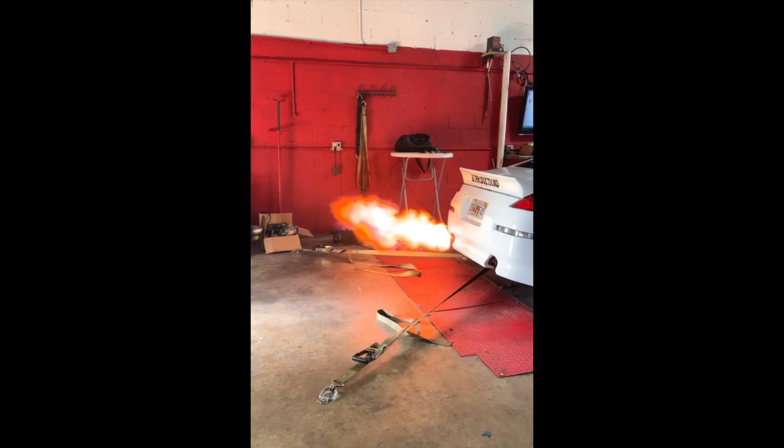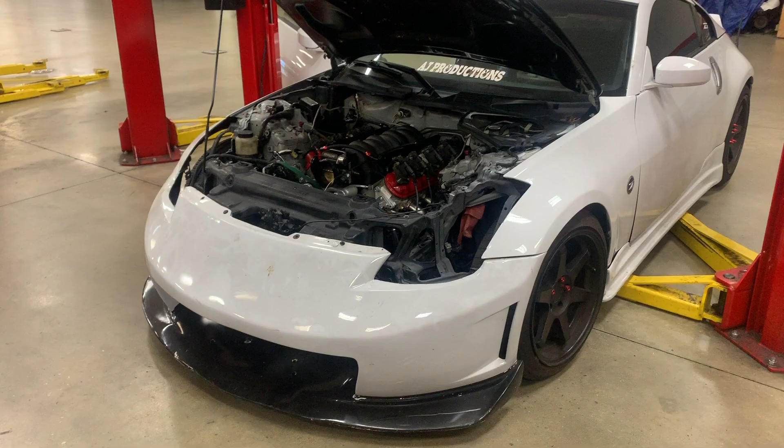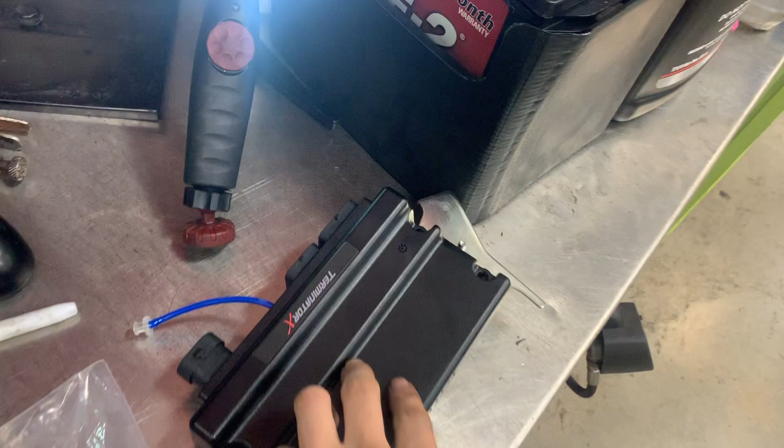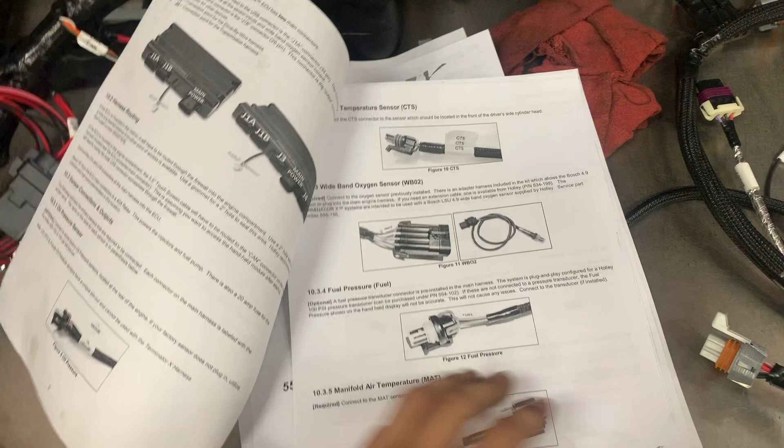Today I'm finally going to be completing most of the wire harness, hopefully all of it, but definitely get most of it done today. Over here is my Terminator X ECU, my handheld, and my harness. Everything is labeled and the instructions are very detailed. It's pretty much plug and play, but I've got to take my time, follow the instructions, and make sure I do this right.

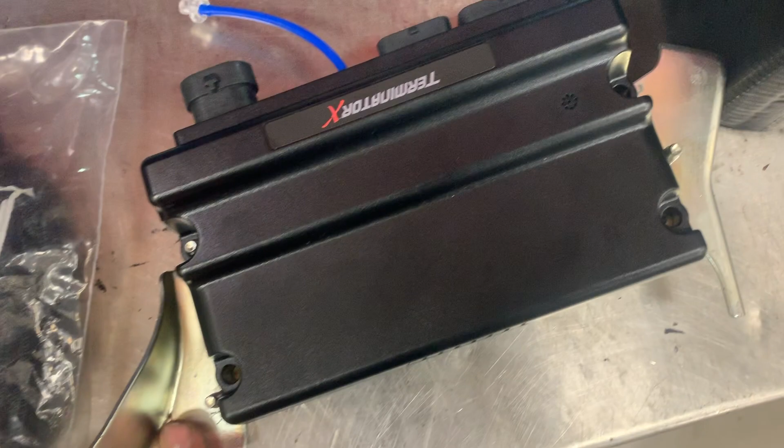The first thing it says to start off with is mounting the ECU. This right here is the stock 350Z ECU mounting bracket, and I'm gonna modify it. I'm gonna drill 2 holes and get 2 bolts in there to bolt on this ECU so I could put the ECU back in the stock location.

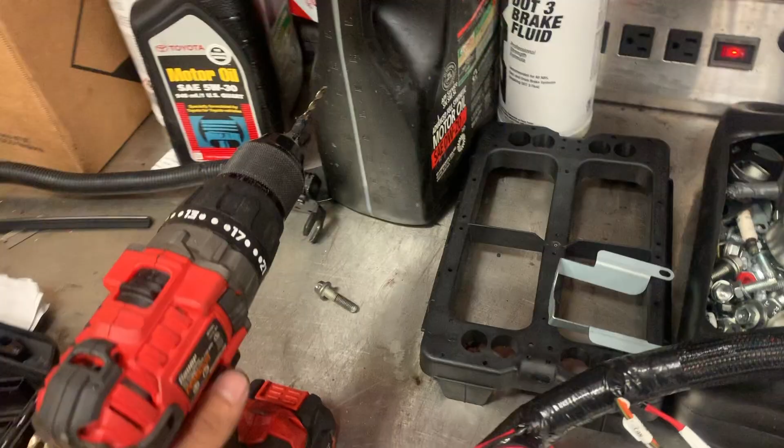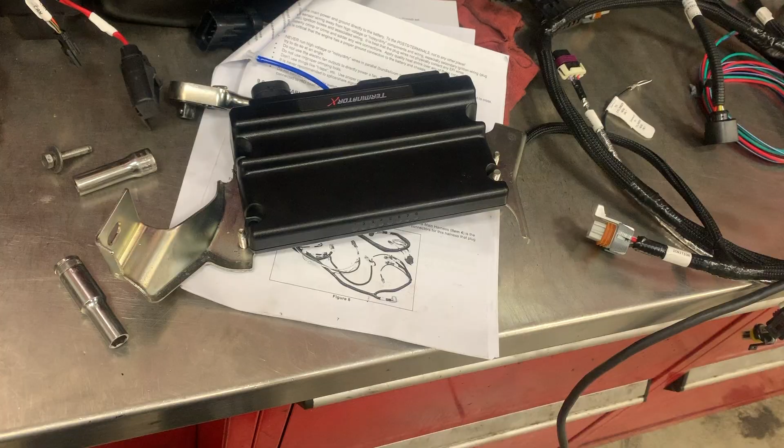So right now I'm about to drill out the bracket and go ahead and find some bolts and bolt it up. I just finished drilling the holes and getting bolts on there. Now I can finally go ahead and install this back in its location.

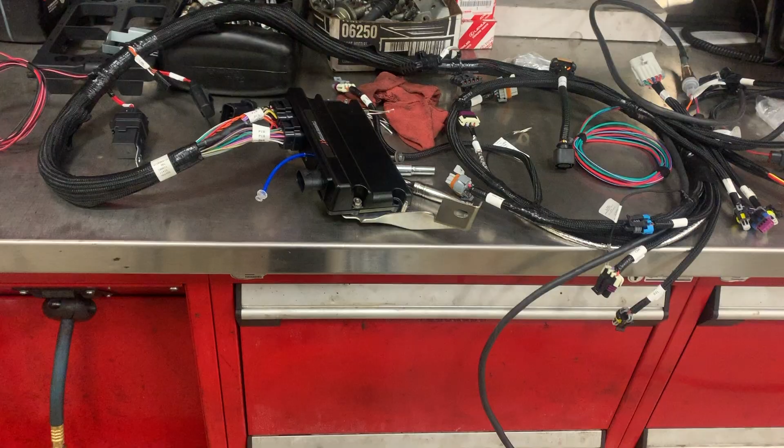Before I mount the ECU, I'm gonna go ahead and run the harness through the firewall, through this hole right here. I already connected the harness to the ECU, so right now I'm about to go run the harness to the firewall and then mount the ECU.

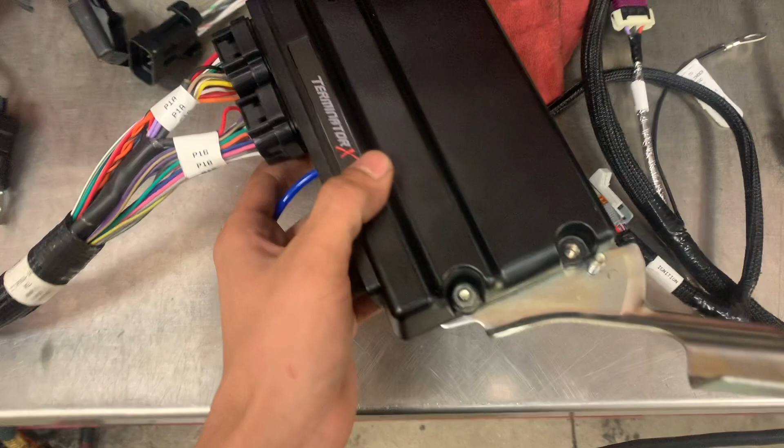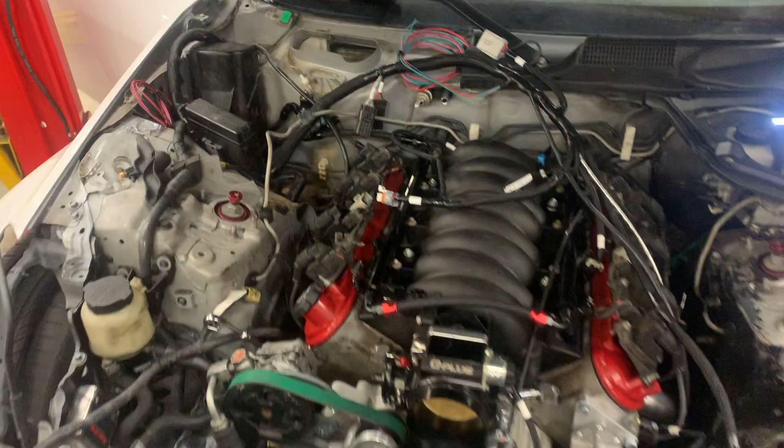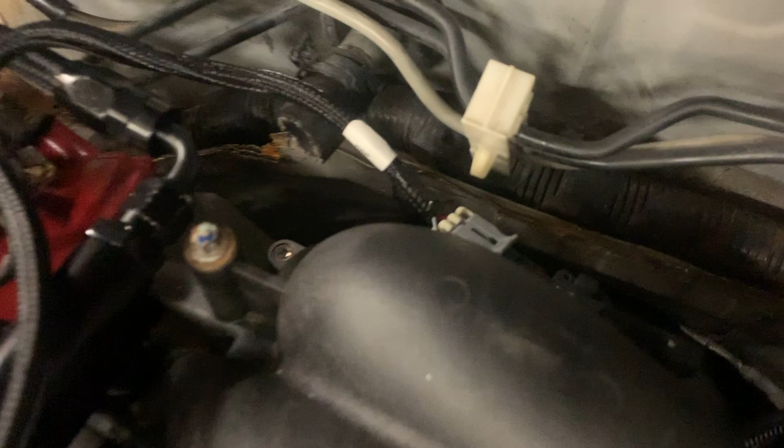I got the ECU mounted and the harness snaked through the firewall. I already started plugging in things. So far I got the TPS sensor plugged in, the IAC sensor plugged in, I have the map sensor plugged in back there, and I also have the knock sensors plugged in right there.

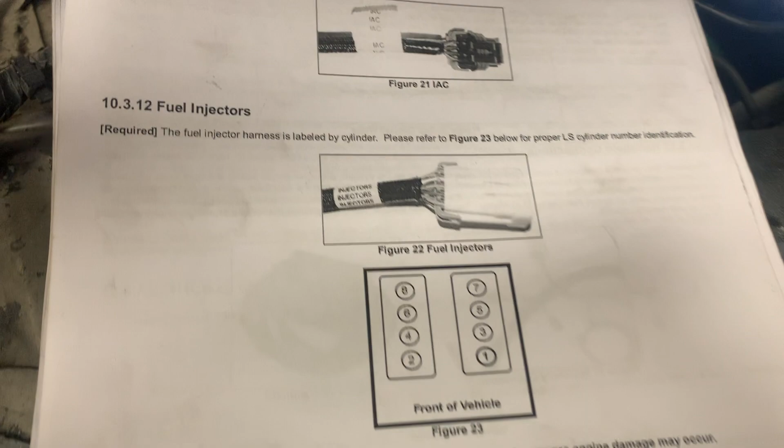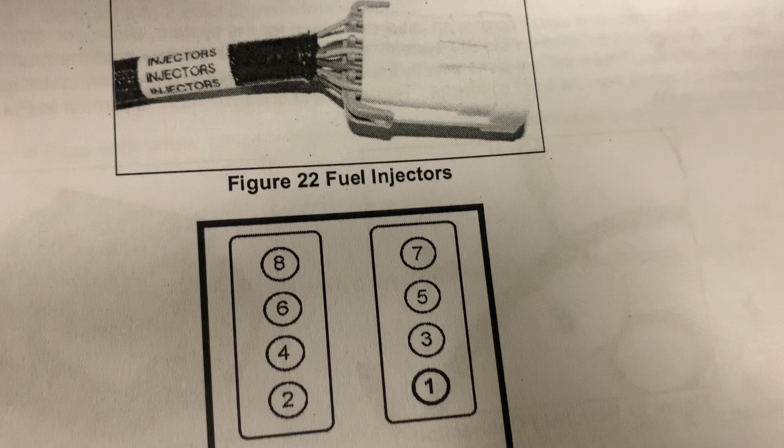Right now it is saying to plug in the fuel injectors. It also gives you a diagram which shows you the cylinders. So right now I'm gonna go ahead and plug in the injectors.

I just got the injectors all plugged in. There's cylinder 1, 2, 3, 4, 5, 6, 7, and 8. I also went ahead and plugged in the ignition coils.

I know it looks like a mess right now, but I'm gonna keep on cleaning it up as I go. Now I got the ignition coils done. Now I need to do the ground wire for the coils, which is right here. And it says to connect to the cylinder head.

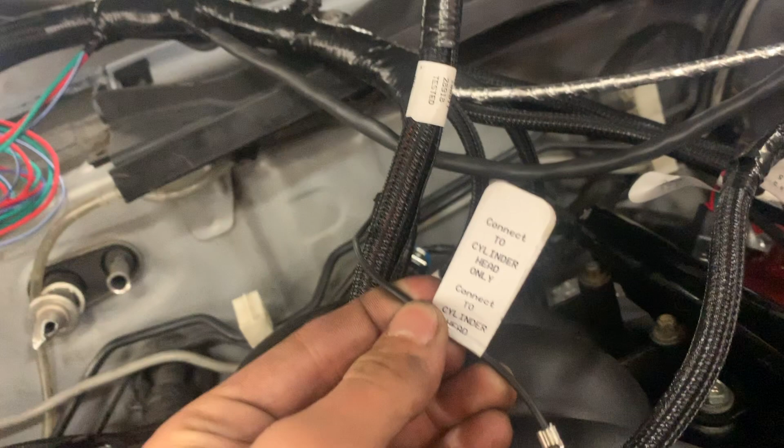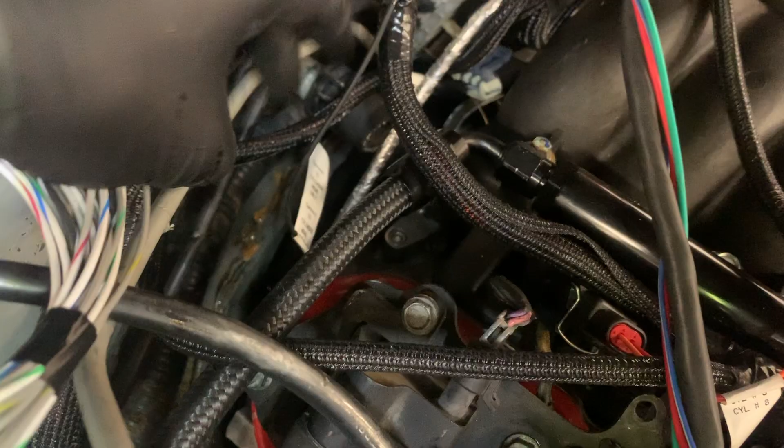I'm gonna go ahead and do that and knock a couple other things off the list. I just got both ignition grounds connected. It tells me to connect them to the back of the head. Got one right here and one on the other side of the head.

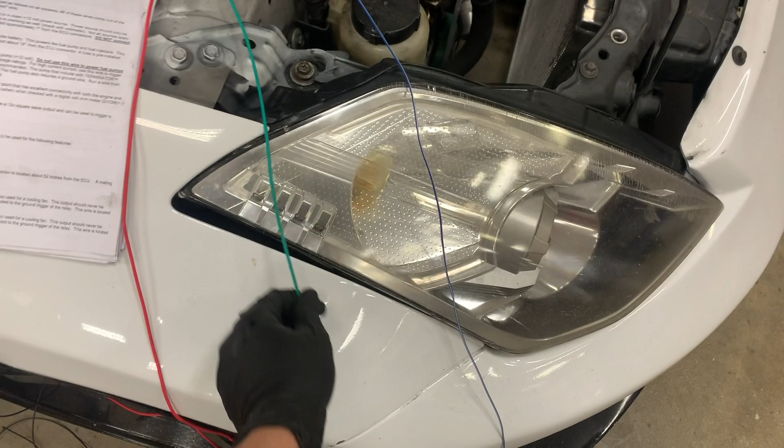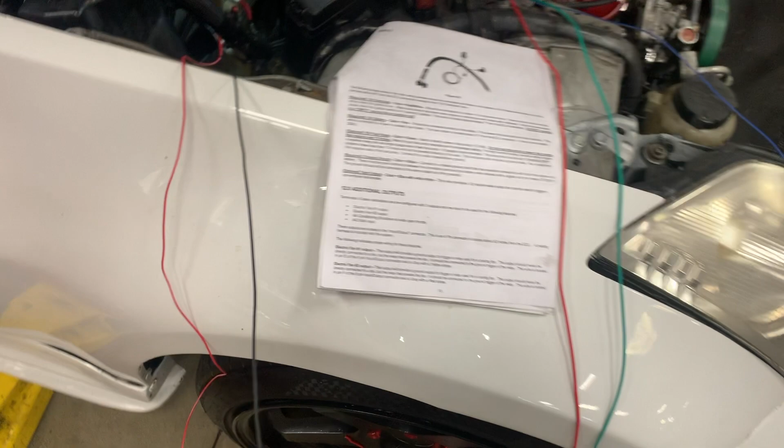Now right here, this wire connects directly to the battery, and this wire directly powers the fuel pump, and this wire directly powers a tachometer, an aftermarket one. I will be running one later in the future. Those are really expensive though. And this is a chassis ground, and this red and white wire, it says to connect to a 12-volt power source.

Switch power source. Over here I have my battery relocation kit, because I'm relocating my battery to the trunk because of the fuel pressure regulator. Over here I have the fittings so I could connect my fuel lines to the regulator.

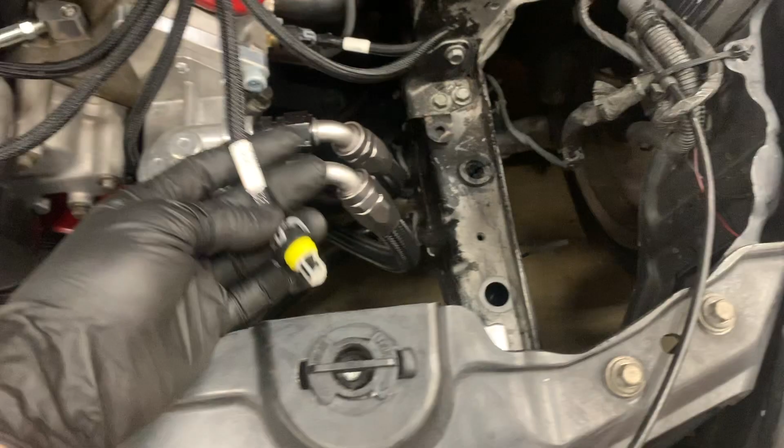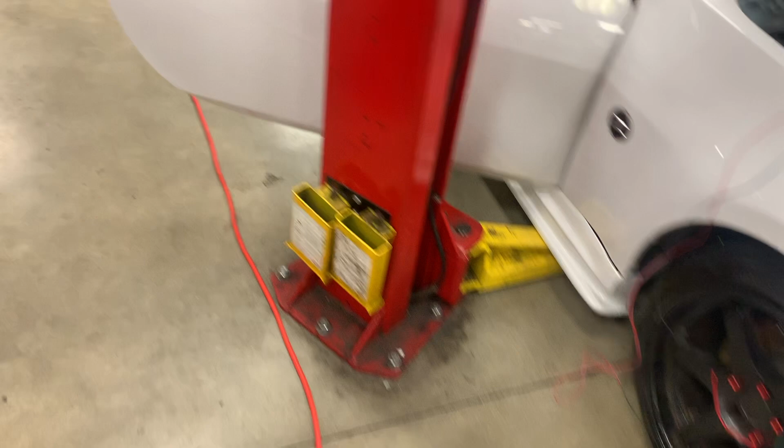Finally got all the fuel lines done. Right here I need to reroute this line all the way to the regulator, which is over here. So right now I have the wire for the battery that came with the kit, and over here I have my ground wire.

So I'm gonna be installing this box. I was looking around in the hatch. I was originally planning on installing it right here, but the box is too big and won't fit. So the best place is right here. I'm gonna mount the box right here, and the vent hose I'm gonna run through here, through the outside.

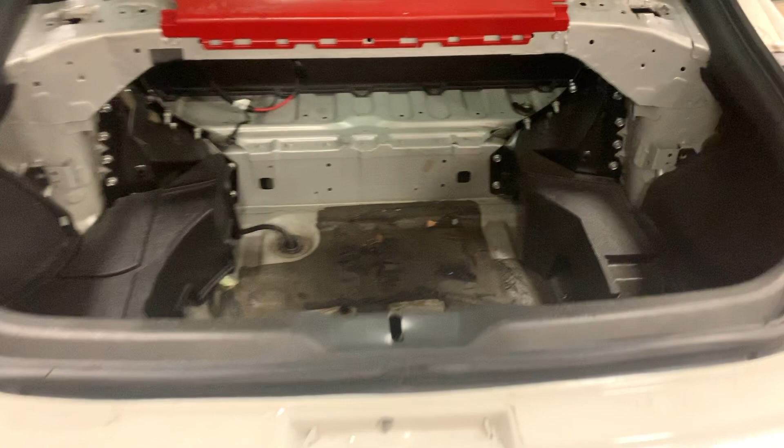Right now I'm about to go and mount the box to the trunk.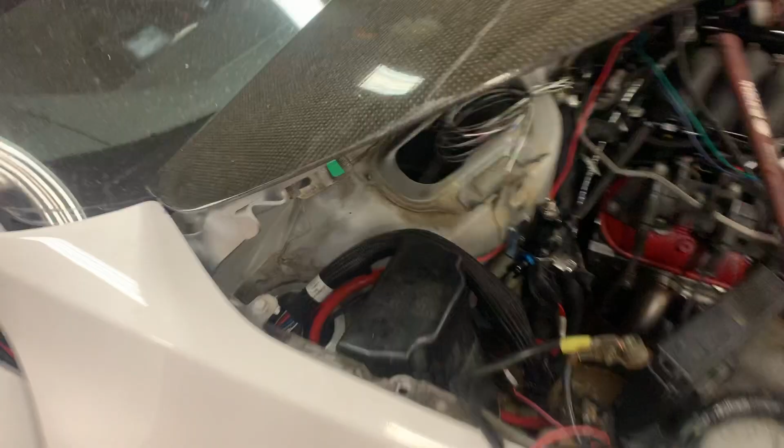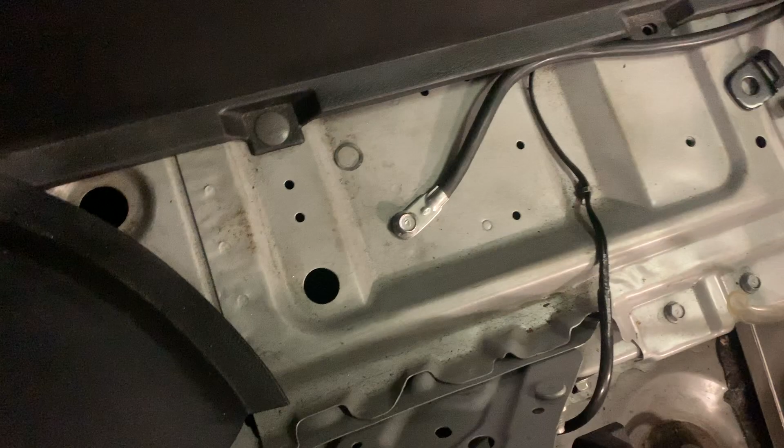Everything's moving along pretty smooth. It's getting pretty late though, so I think this is where we're gonna stop at today. Made pretty good progress though. Connected the ground to the chassis right here, and now we finally have power.